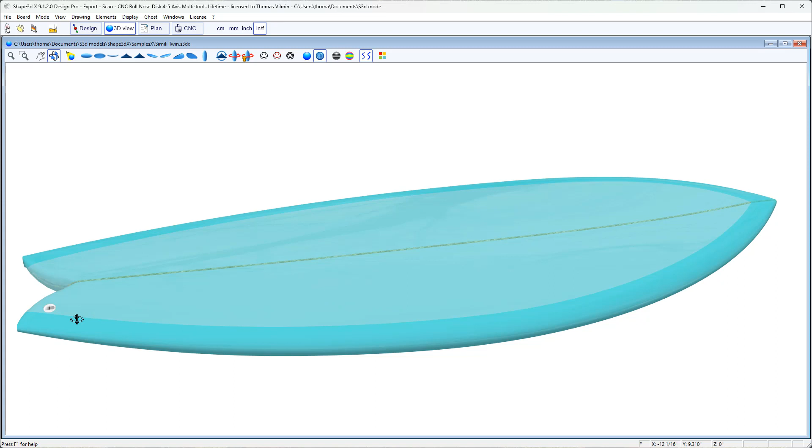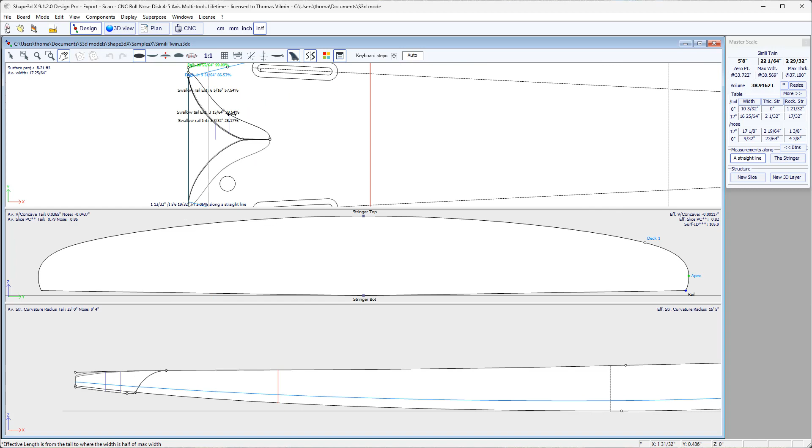So the main complicated thing here is the swallowtail design, which you had to draw in previous versions by using at least two 3D layers on top of each other. So it was quite technical. We can see in design mode here that there was a first 3D layer, which put the hole on the side view, and then another 3D layer, which surrounds the swallowtail rail here.

And then there was this beak nose here, which was not very complicated to draw, with this method which uses curve editing in the view from above, but which requires quite fine adjustments to get a good, smooth result. And here the result is good, but in fact, when we look at the detail, it's still not really perfect. We can always find an angle where we see that there is a slight inflection. The shape isn't absolutely perfect, though it needed a bit of work.

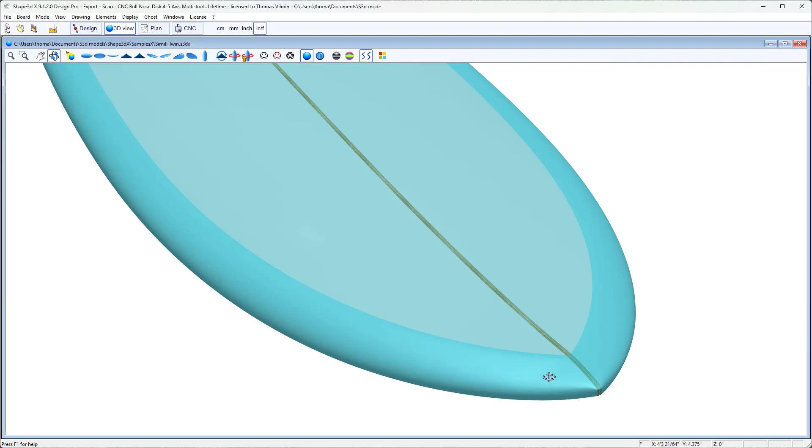So to remake this swallowtail, I'm going to start by hiding the channels. I'm going to delete this first 3D layer, which marked the swallowtail's depth, which is now no longer useful. And next, this twin type 3D layer, I'm going to make it a free layer. Okay? So I'm going to put the homothetic interpolation mode back on, which works better in this case. Maybe I will do a video in the near future to explain the difference between the different interpolation modes. You can also look at the tutorial.

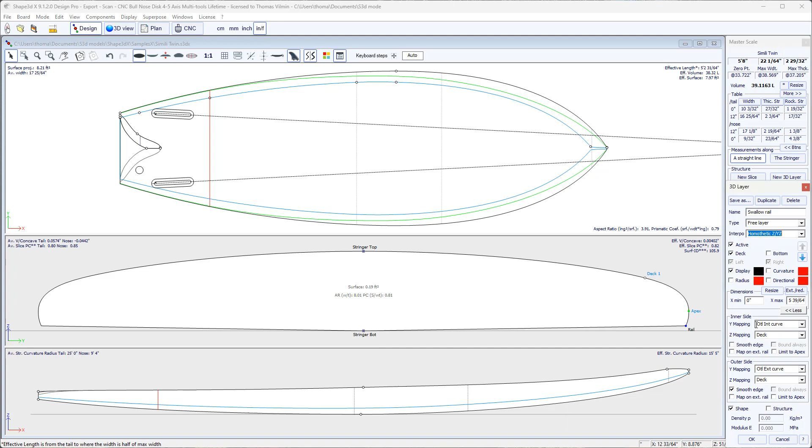And I'm going to map the inner curve of the 3D layer, not on the deck, but on the bottom. Okay? And so now, it makes a 3D layer, which makes the swallowtail's inside rail directly, and I will also be able to move this inner curve to the other side of the surfboard, with y less than 0.

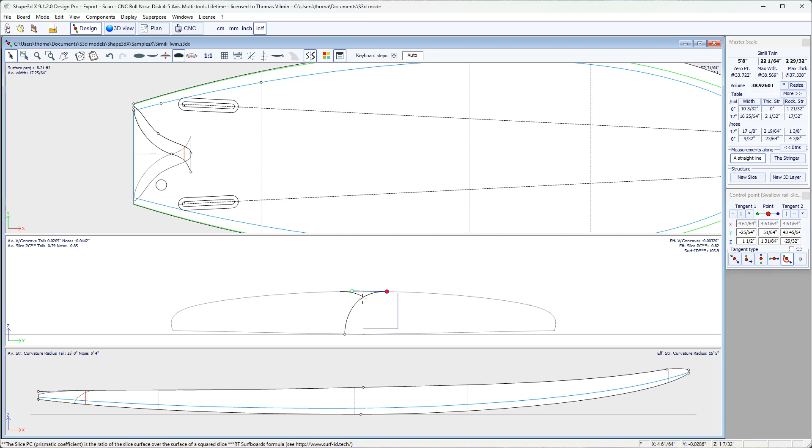And the result it will have is that... I'm going to place the definition slice here. We can see that the slice is created until y equals 0. But the result is that this slice cut on the y-axis equals 0. And so, quite simply with a single 3D layer and a defined slice, we have a very clean, perfectly adjusted swallowtail. Now let's see. How can we remake this beak nose?

Using these 3D layers. So, rather than editing the deck 1 curve here, to make this kink, we're going to unedit it. Okay? We're going to delete this slice here. And here in the side view, we're going to make a bow with virtually regular thickness, like we would have before making the beak nose.

And next, we're going to add a free type 3D layer on the front of the board. For example, we're going to make the beak nose start about here, around 4.6. So new 3D layer, type free layer. Here we're also going to put it in homothetic mode, which gives the best results, and we're going to move it from 4.6 to 5.8, which is the length of the board. So the inside curve will be well mapped on the deck. And we just have to put the outer curve on the apex of the board.

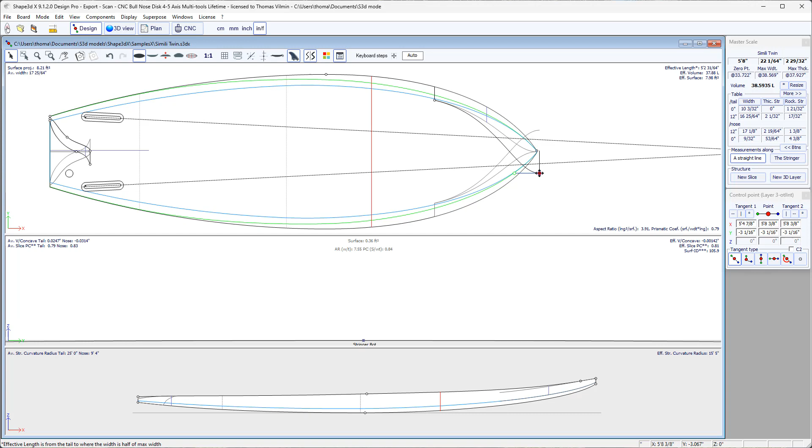So we're going to choose the apex curve for the Z. And for the Y, we put rail, which means that it will stick directly on the rail. So it will take the original shape, which corresponds exactly to the apex curve. So we can leave it like that. The result will be the same. And so we're going to put the inner curve around the level of point deck 1, so that it's just the rail which is modified. And once again, we're going to make the y of the inner curve less than 0.

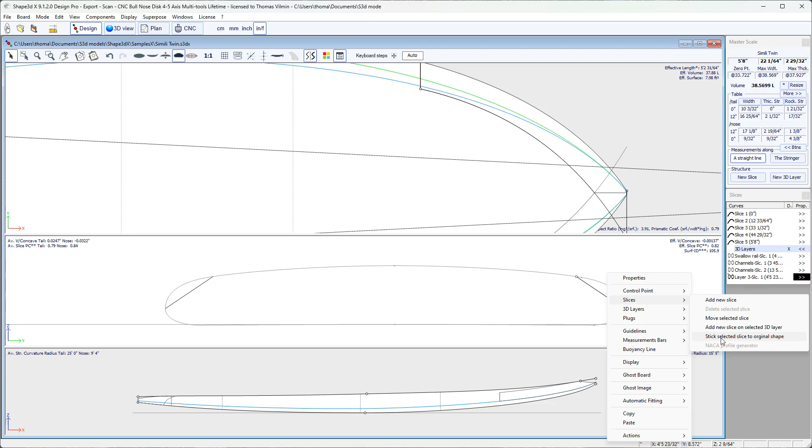To have a perfectly continuous transition between the start of the 3D layer and the front of the board, I just put the definition slice at the beginning, and next I right-click here. Slices, stick selected slice to original shape, to have exactly the same shape. And so we see that here we're going to go from exactly the original shape, and then next, where the original file starts having more boxy rails, here we stay with the same rail.

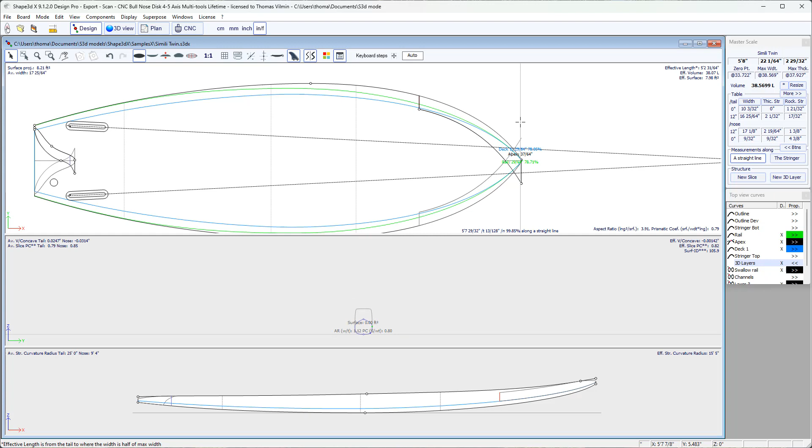And when y equals 0, it's as if we're continuing to shape beyond the y-axis equaling 0, and that in the end, we cut the result of this shape, which makes exactly what we call a bull nose. And the result is absolutely perfect, without any irregularities.

There you go. I'm going to put this file online in the warehouse. You can download it and play with these new 3D layers.